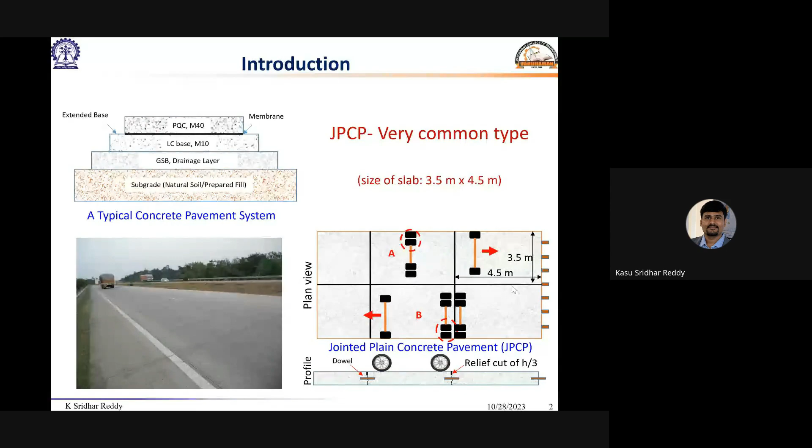Coming to the types of concrete pavements, we have got a variety like jointed plain concrete pavement, which we typically see on Indian highways, but in most cases we may not be able to see CRCPs - continuously reinforced concrete pavement systems. But slowly people are trying to adopt CRCP in India also, and a new code has come up for CRCP.

There are no specific guidelines for JRCP, jointed reinforced concrete pavement, even in the case of AASHTO, because there are a lot of limitations and restrictions on how to design, and a lot of debate on how to design and what kind of performance criteria needs to be considered for JRCP. So therefore, we do not have much guidance from various agencies across the world.

Coming to the jointed plain concrete pavement, like any other pavement, it will also suffer from various kinds of distresses. Typically, we design for the transverse cracking not to happen on the highways, and therefore we have to account for the transverse cracking.

In addition to that, you may also come across some kinds of cracks like longitudinal cracking, which is along the traffic direction, and there are some cases which may also see corner cracking in terms of durability. The moment longitudinal crack occurs, this chunk of the slab is going to be longer in span and smaller in width, so therefore it is highly prone to transverse cracking. When the transverse cracking and longitudinal cracking meet each other, the slab is going to shatter into a number of pieces.

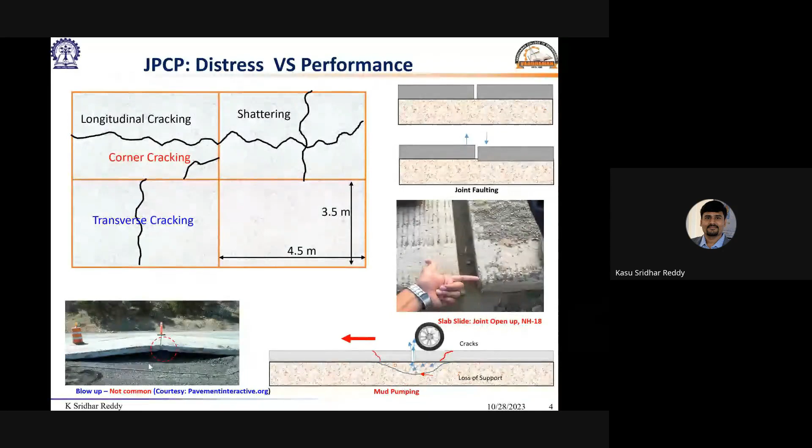Considering those distresses, we only bother about the transverse cracking in two ways - one is about bottom-up cracking and the other is about top-down cracking. Both of them are transverse cracking only, but they are respective to the temperature gradient that we see.

In the daytime, the slab is expected to curl something like this. In the night time, the slab is expected to curl something like this, because of the temperature difference from the top fiber to the bottom fiber.

Considering those curling movements in the slab, if we allow traffic onto it, the moment it loses its support at the mid portion, or loses support at the edges during evening hours or late nights, there could be a possibility for top-down and bottom-up cracking scenarios.

As per IRC 58, we consider a philosophy called Miner's approach for cumulative fatigue damage analysis, where we always seek the thickness which is safer in terms of cumulative fatigue damage, which must be less than 1, both in the case of bottom-up cracking and top-down cracking.

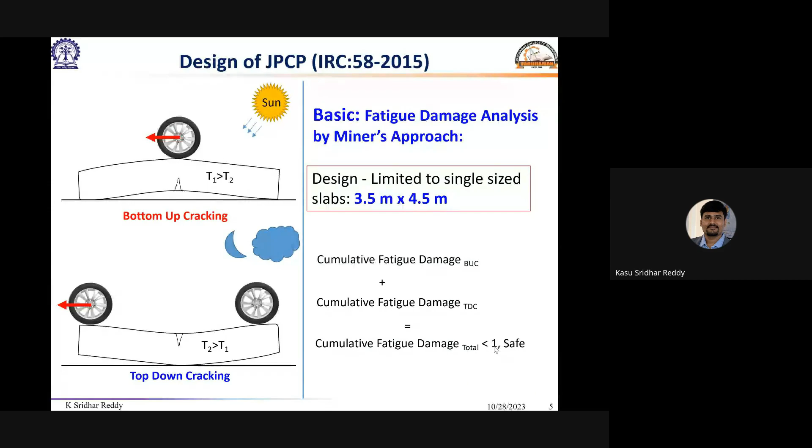Ideally, when we design the concrete pavement with IRC 58, we may arrive at 270, 280, maybe up to 320 mm slab thickness for our Indian national conditions. Owing to restrictions in handling such thicker slabs at distressed locations, it becomes a typical and cumbersome job. So when we look for an alternative, there is one called cast in situ short panel concrete pavement.

we are bound to use load transfer devices. But when we go for thinner pavements, we solely depend on load transfer through aggregate interlock - a kind of shear lock mechanism that happens the moment all the designated joints crack to full depth. All those cracked joints are expected to serve load transfer through aggregate interlock only.

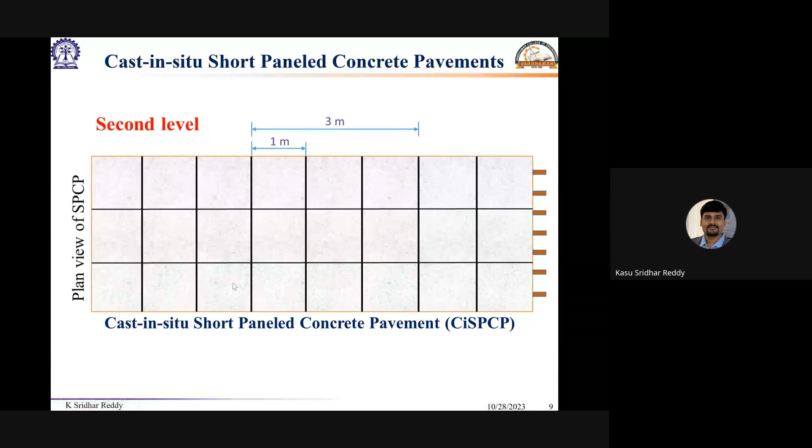Coming to the global experience on short panel concrete pavement, the first ever construction report that I have found through various databases is the construction report from Michigan Department of Transportation, where they introduced short slab construction in the 1970s. Thereafter, because of some restrictions on saw cutting, riding quality, and people's perception, they became reluctant to put these short slabs on their interstate highways.

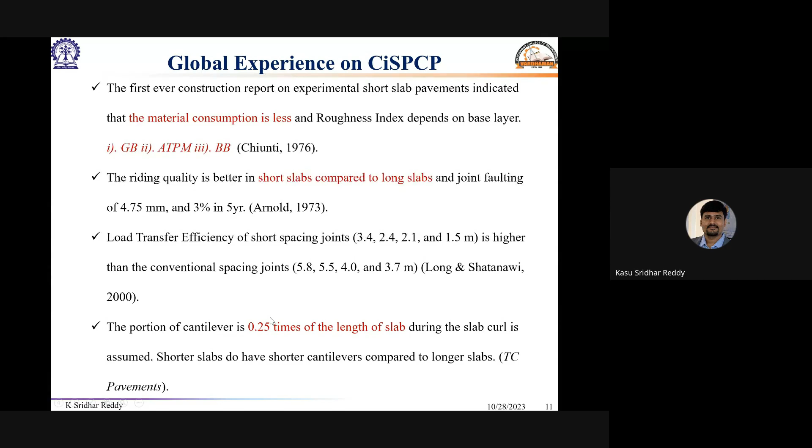Here the riding quality is better compared to the longer slabs, and we could also see the load transfer efficiency of short joint spacing is much higher than conventionally spaced joints. The portion of cantilever is assumed to be 0.25 times of its slab length, but it is unknown. We have tried to quantify it.

Coming to the lateral drainage and subsurface drainage, there was a concern about movement of very fine particles from the base layer and sub-base layer to the top. So eventually, when it loses its fines at the base layer and sub-base layer, it will also lose the support, and eventually this will result in corner cracking.

Coming to the accelerated performance testing of short slabs, this was a sponsored study carried out at the University of Illinois. They found that corner cracking and longitudinal cracking is predominant on their test track.

Coming to short slab sections, Chile has been aggressively trying to adopt these short slab concrete pavements in recent times. They have constructed a lot of short slab sections on their highways. With their observation, longitudinal cracking is higher than transverse cracking in the case of short slabs, compared to corner cracking.

What I feel is, corner cracking is dependent on how thick a slab you are providing during construction. If you are providing thinner slabs, they are more prone to curling, so there will be a high chance of corner cracking. If you are providing thicker slabs, rather than having a lot of curling, they will result in better performance in terms of corner cracking, and they'll result in either longitudinal cracks or transverse cracks.

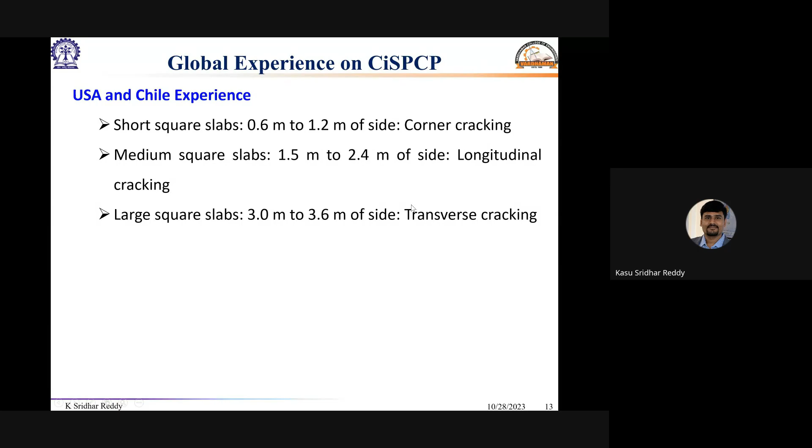Coming to the research gap, identifying the global experience, these are the research lacunae we have identified. There are no stress charts properly developed or available for ready-made design of short panel concrete pavement. There is no performance data, and there is no rational performance data.

Performance data is available on whether it is cracking in corner, longitudinal, or transverse direction, but we do not have any statistical number, and no design methodology or design guidelines are available for cast-in-situ short panel concrete pavement. India is going to have a new IRC draft on cast-in-situ short panel concrete pavement, maybe in a month or two.

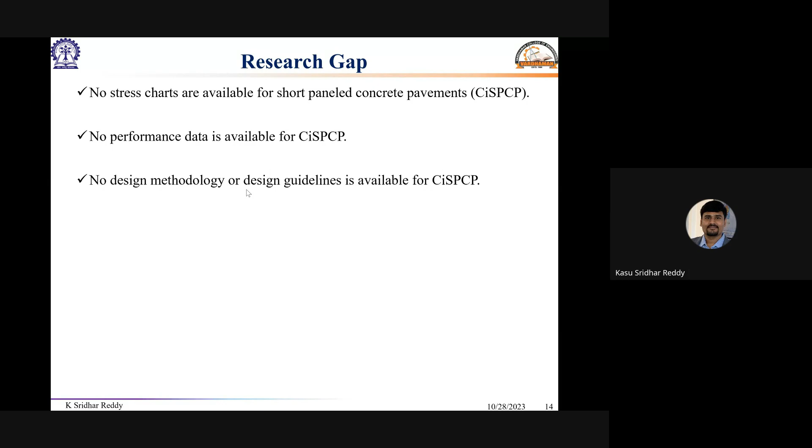It is at post-processing stage of publication. It has been approved at various levels, so that is going to be published, and it has not been given any serial number yet, so therefore I do not want to disclose that IRC code number.

Coming to the construction of short panel concrete pavement on low volume roads, this was done by Professor Pandey, under supervision with the kind help of engineer Rajiv Chitraj. He's the superintendent engineer from West Bengal. With his kind help, Professor Pandey could supervise, and with his innovative idea, he could construct a short panel concrete pavement on a block pavement.

The existing block pavement was permanently deformed all along its wheel paths, and there was a lot of settlement at some locations. As we typically understand on our Indian roads, whether urban or rural area, all our roads suffer from surface drainage and subsurface drainage issues. Poor subsurface and surface drainage is there at all levels, at all classifications of the roadways.

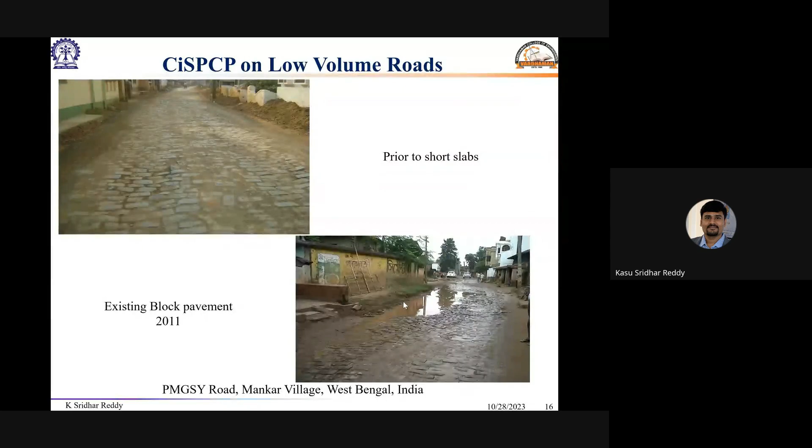Prior to the short slabs, this was the condition of the block pavements, in a village, and this road runs through a village. It was supposed to be constructed by PMGSY. That was the initial condition, and when Professor Pandey suggested this short panel concrete pavement, at that time there was not much technology to make use of good diamond cutters to make the sockets at regular intervals, and it was expensive.

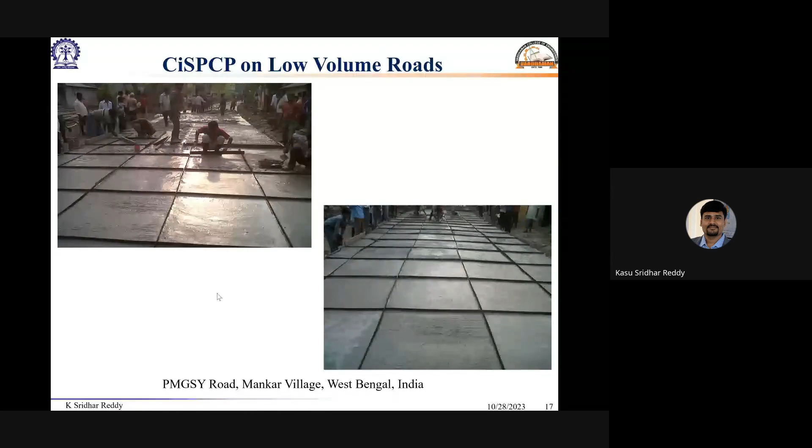So therefore they made a very traditional way of making the joint sockets by introducing a 3 mm thickness wooden plank. They inserted it at regular intervals as per the slab dimensions, and it was opened to traffic, and it is absolutely working fine.

Personally, I have visited this village road, and we have carried out falling weight deflectometer studies on the same road. It was found that good load transfer efficiency was observed, higher than 85%. It is well and good, even after years of service to the traffic.

Coming to the observation at the edges of the pavement, all the sockets that they introduced with the wooden planks or plyboards of 3 mm, all of those joints are cracked to full depth. So that means what we designed for is absolutely served its purpose.

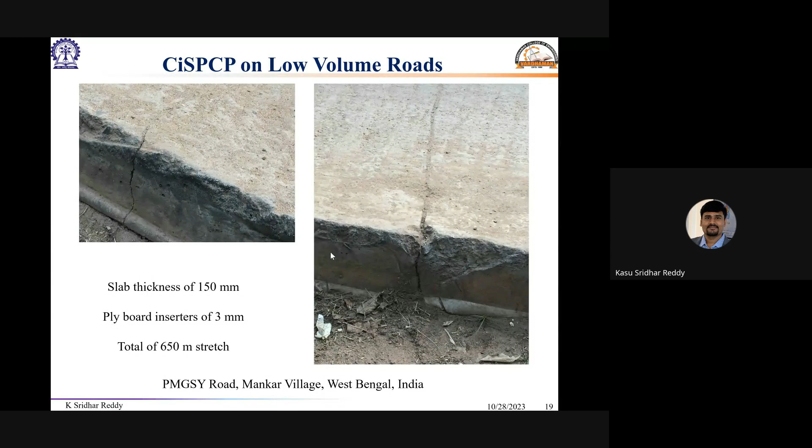This section was around 650 meters, and it carries heavier loads of sand quarry traffic in that village. The slab thickness was about 150 mm. This was the second test section that was done under the supervision of Professor Pandey.

But personally, I was there during their construction, and I have tested their materials for fatigue and all the laboratory characterization. This is another road which will also carry sand truck traffic, about 100 to 150 sand trucks moving on this road every day.

This was the condition of the existing pavement, where Professor Pandey suggested cell-filled concrete pavement way back in the early 2000s. By the time it reaches 2015, 2016, this was the condition of the pavement. There was a large settlement in the cell-filled pavement. So therefore, they approached Professor Pandey.

We suggested short panel concrete pavement on it. By making corrections wherever the larger settlements were there, we suggested corrections using a lean concrete material. Once it was leveled, we put in a 100 mm slab thickness pavement. The sockets were made to 1/4 to 1/3 depth.

Usually we make it to 1/3 depth, since it is a low volume road, and it was hard to procure diamond cutters for a local contractor. So we used handheld cutters to make sockets at every 0.5 meter, in the longitudinal direction and in the transverse direction. This was the finished pavement.

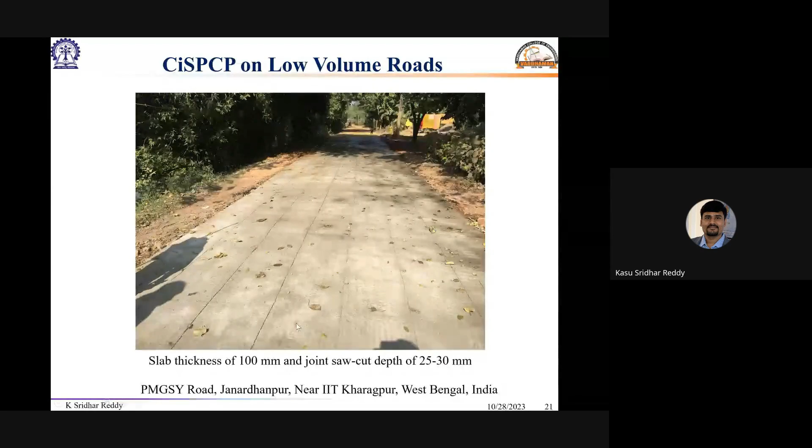Coming to the test sections that we have constructed on national highways, we have constructed two test sections: one on NH18 and another one on NH19. The one we made for NH19, which was a Grand Trunk Road on Panagarh bypass, was used for making the construction report on short panel concrete pavement. Because we do not have any construction practices for short panel concrete pavement, especially on highways, although we have got a little experience from the low volume roads.

The second test section was constructed for about 1.5 kilometers on NH18, which runs through Jamshedpur, Ghatsila, and Chichira, connecting to Chichira of West Bengal and Jharkhand border. This carries major traffic, since Tata Steel factory is in Jamshedpur and Hindustan Copper Limited is nearby, so all truck traffic carrying raw materials passes through this highway, and this was used for the performance investigation.

Through this, we were able to arrive at some preliminary analysis about how to select the slab thickness, how to select the site, and what kind of materials to select for the construction purpose.

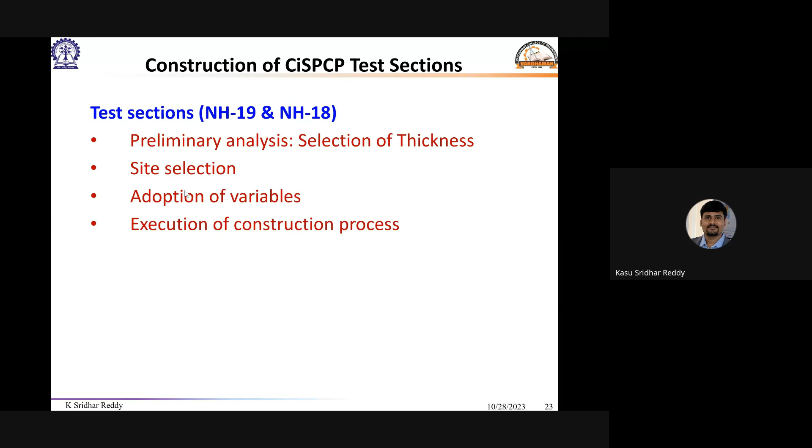For the first test section, we made a single slab model. This was suggested by Professor Pandey and MV Arunchand of Kerala state, who is probably working for PWD of Kerala. His initial investigation in his MTech work was extended to the preliminary analysis of the single slab model, and I extended the same for identifying the slab thickness for the first test section.

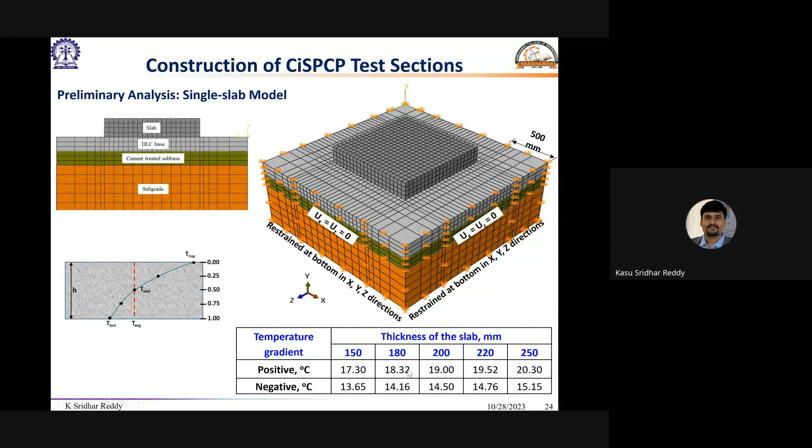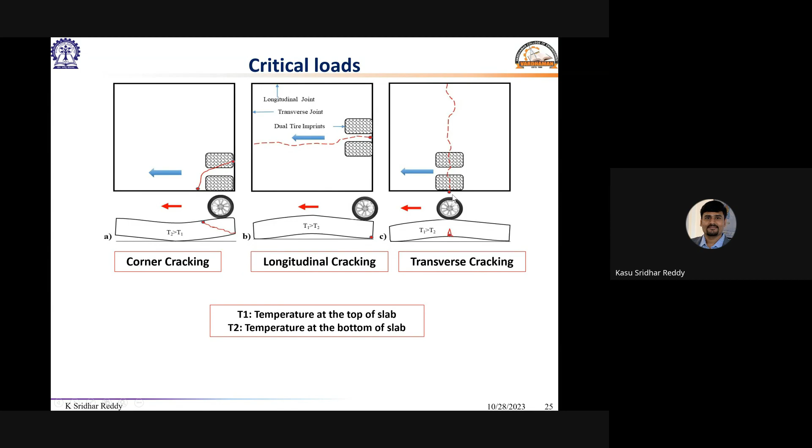These are the slab temperature gradients suggested by IRC in various codes, IRC 62 and IRC 58, for various slab thicknesses, and some of the slab thickness temperature gradients were interpolated. We adopted a non-linear temperature gradient for critical load conditions: one for corner cracking, another for longitudinal cracking, and a third for transverse cracking, owing to their performance reported in literature.

Coming to the construction of the first test section, which we did on a high embankment, located at a pedestrian underpass, PUP, or vehicle underpass. There was a high embankment as high as 6 to 8 meters at the mid location.

We could see around 384 meters of stretch on the NH19 section, where we varied the interface bond conditions, but the slab thickness remained the same. So these are the variables we considered.

Coming to the sub base and base layers, we strengthened them as much as possible from the contractor's and the client's perspective. To account for this, we used 2.5% cement content for making the cement treated sub-base layer, and for the lean concrete base, that is dry lean concrete, but for the first time, we tried a porous DLC layer on this section.

In the literature review, we saw there is a restriction on fine content because of the number of joints present in short panel concrete pavement. There's a high chance the fines would move up through these joints, so we wanted a restriction on the fine content. Therefore, we went for zero fine concrete, literally, for the lean concrete base.

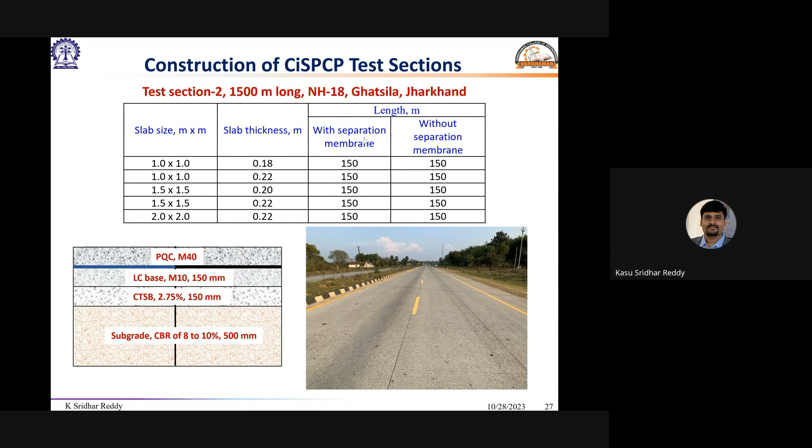Coming to the construction process in stages, the first stage is preparation of the subgrade for the readiness of the cement treated subbase.

The cement treated subbase—by the time we had selected the site, it was too late and they had already compacted the subbase layer. So with our supervision and suggestions, they modified this already compacted granular subbase layer with a cement content of 2.75%. We spread the cement bags all along its 1.5 kilometer stretch, cut the bags, and spread them over the larger area, and this cement mixing happened through a plogger machinery.

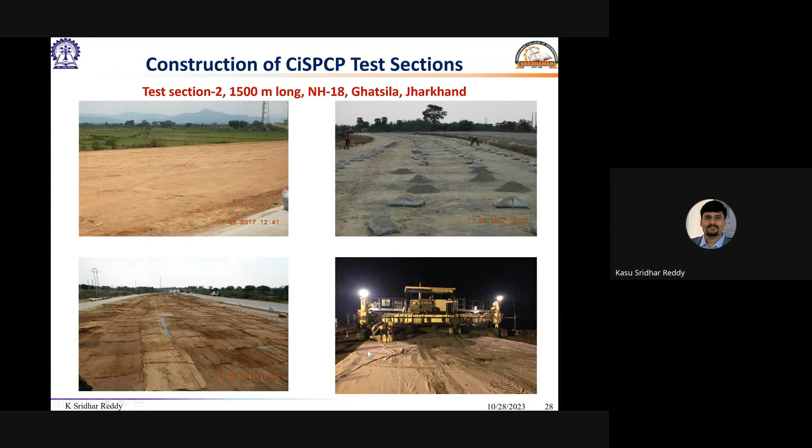Then the DLC was constructed in 2-lane construction since it is a 2-lane highway with paved shoulder. Its pavement width was around 10 meters, but the lane construction for the DLC used asphalt paving equipment, so it has a longitudinal joint in the DLC. Wherever we had to put the geotextile membrane, we put it, and then full width paving happened in one go.

Coming to the finishing stage, it is now in servicing stage. Two of the test sections are in servicing stage. The one constructed later, test section 2, is performing absolutely fine and carrying high truck haul. Here we could see there is a mention about slab thickness savings—it is around 50 mm to 90 mm compared to the adjacent jointed plain concrete pavement.

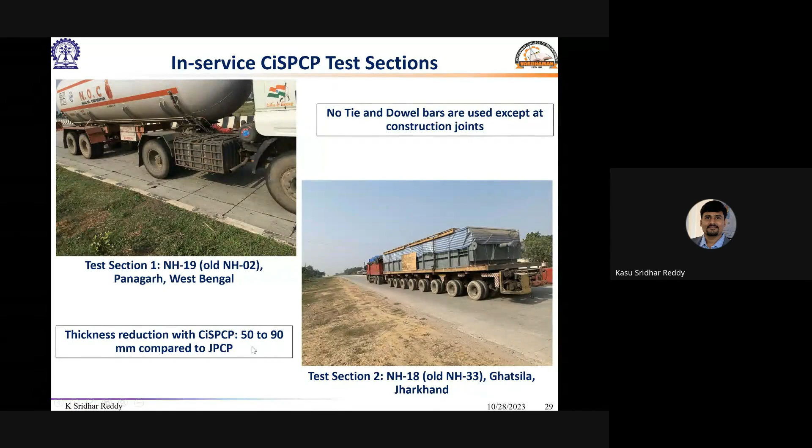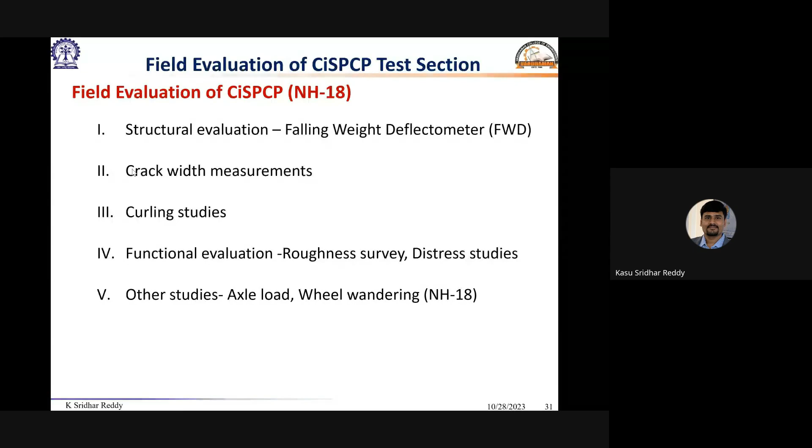Coming to the field evaluation of these test sections, initially we planned for structural evaluation. Later, we tried to evaluate it functionally also, in addition to the structural evaluation. Crack width measurements and curling studies were done because there is a lot of gap in the literature, so we wanted to understand that, and therefore we carried it out.

We compared two deflections—one is the unloaded slab deflection and the other is the loaded slab deflection—and tried to calculate the load transfer efficiency. This load transfer efficiency data is plotted against various seasons ranging from winters to summers, and across slab dimensions of 1 meter by 1 meter, 1.5 meter by 1.5 meter, and 2 meter by 2 meter. All of them are square slabs only, unlike the jointed plain concrete.

Here we could see that the load transfer efficiency increases with age. As I told you earlier, with the kind of first level cutting we made, the concrete has a tendency to crack only at 3 meters, 4 meters, or 5 meters at regular intervals, but not at 1 meter or 2 meter, whatever joint spacing we make.

So by the time we opened the traffic and during its service, the number of contraction joints adjacent to the initial cracked joint also gets cracked. Therefore, the joint opening at every contraction joint has become very small. Because the joint opening is small in dimension, there is a large load transfer distribution that happened. The load transfer efficiencies ranged between 65% to 95% for any given slab dimension adopted on our test section.

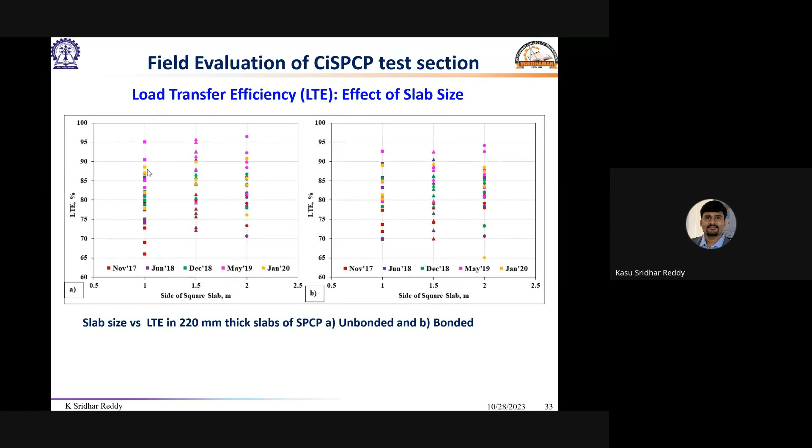The second thing we tried to observe is whether there is a correlation between the joint opening at the edges along with its load transfer efficiency. For that, we first identified where to measure crack width, since we do not have any specific guidelines or test protocols to measure it. So we used a simple handheld microscope bought from a local supplier—it's cheap enough, costing around 5,000 rupees. Anyone can perform these crack width measurements at their own convenience.

We captured some images, and these images were processed further; we measured the crack width through a calibration process, and the average crack width within that image is taken as the crack width, which is plotted against the load transfer efficiency. We could see that a number of joints fall in the first region, and some joints fall in the second region. These regions were identified based on the long-term pavement performance program threshold of load transfer efficiency of about 85%.

This 0.6 mm crack width is identified and marked as conservative. In the literature, they have suggested around 0.725 mm, but that was not from a proper test protocol that somebody carried out.

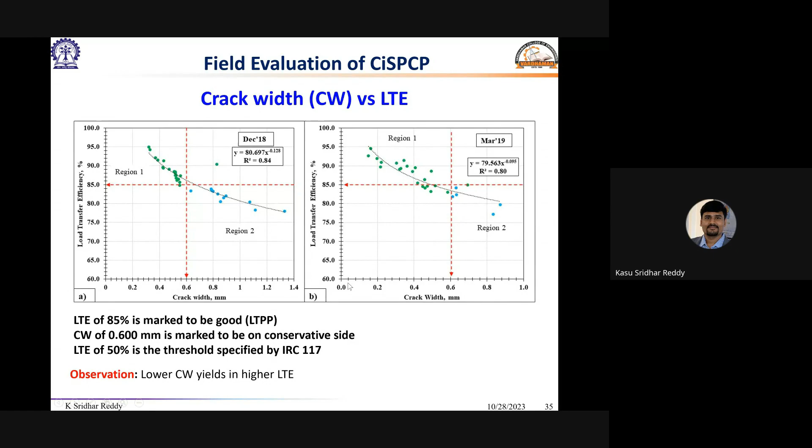Load transfer efficiency, considering 50%, is a threshold limit specified by IRC 117 for concrete pavements. We see that a large number of joints perform better, both in terms of load transfer efficiency and crack width opening. Very few joints fall into region 2, but still these two regions of data fall into the good to fair performance range.

Coming to the field evaluation of curling, rather than performing in the laboratory or within the campus as most people try to do, this is real-time data. We fabricated our own setup with aluminum frames, with a stud set on either side. At the mid location, we fitted a dial gauge to capture slab deformation with time and temperature changes. In addition, we also measured the temperature gradient along the slab depth.

This is the curling profile that we typically see. It looks like a sinusoidal wave when plotted on a timeline diagram, though here the timeline diagram is plotted at a different scale with the slab dimension, so it appears as a sinusoidal wave.

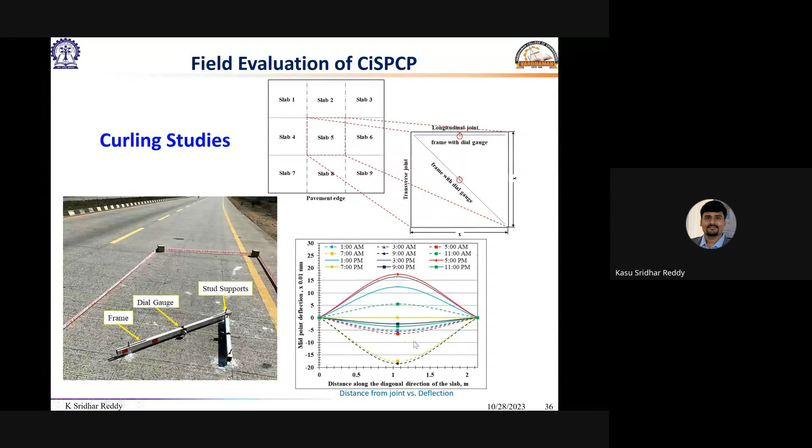If you keenly observe the curling data, there is a delta T temperature gradient along the slab depth, with a maximum slab temperature gradient at some location at some point of time. After 2 to 3 or 4 hours, we see the maximum deflection in slab curvature. This means the slab curvature is not instant; this behavior is attributed to the thermal conductivity and specific heat of the concrete material.

In addition, we found that the higher the slab dimension, the higher the curling magnitude. From 1 meter to 2 meter slab dimensions, the slab curvature increases, and the magnitude of curling increases, whether it is a bonded or unbonded pavement.

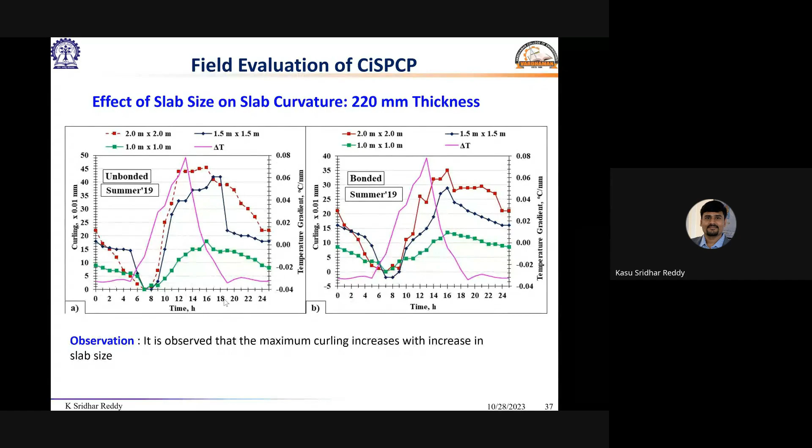Moving on, a lot of people have a perception that short panel concrete pavements with too many joints will cause poor riding quality. It is not a fair perception, and it is not so — this is proven by our investigation.

We compared different slab dimensions, which account for a large number of joint spacings, in addition to jointed plain concrete pavement. As per our belief and understanding, the paving mechanism adopted at the construction stage influences riding quality much more than the number of contraction joints provided on concrete pavements. All our test sections performed in good to fair condition, except at one location.

When we compared these sections with jointed plain concrete pavement, the riding quality was even poorer than our short panel concrete pavement. So there is essentially no correlation between riding quality and short panel concrete pavement joints, and this was the case in the literature as well.

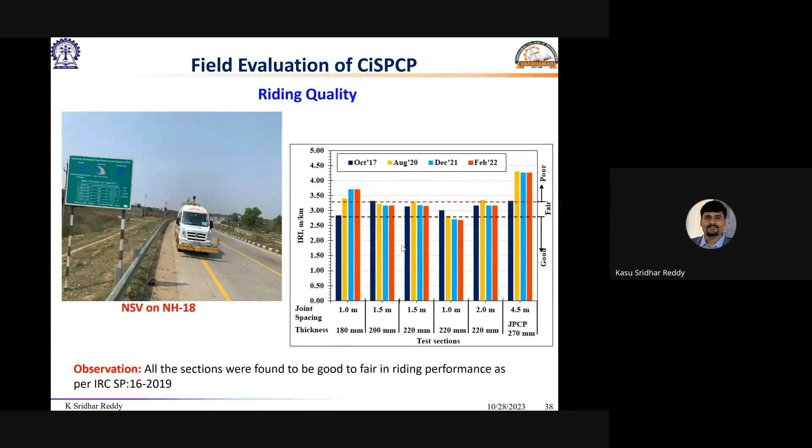Coming to the identification of critical wheel paths, we conducted wheel wandering studies on highways by marking the pavement at 250 millimeter spacing. According to the slab width, pavement width, and number of lanes adopted on the highway, these critical paths will change accordingly.

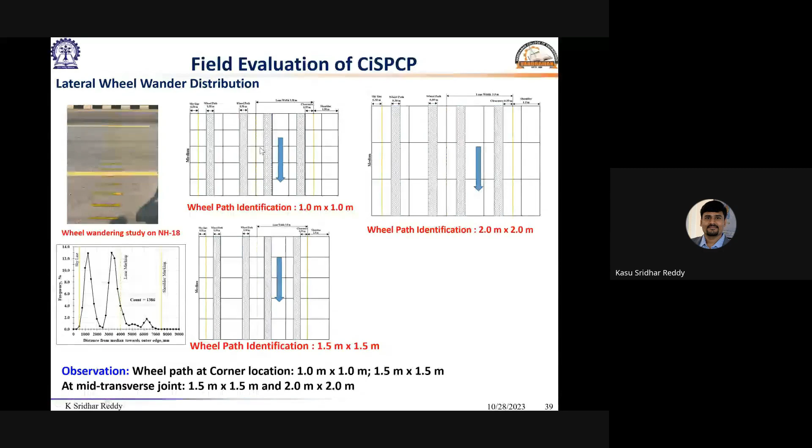When adopting a slab dimension, you must choose carefully. As part of this study, on 1 meter, 1.5 meter, and 2 meter slabs, we tried to identify the critical path location for a variety of slab dimensions, and through this we identified some critical load positions, which I'll explain in the coming slides.

Thereafter, the data we collected from the falling weight deflectometer was simulated using Abaqus software by modeling the pavement system. This pavement system was used to back-calculate all its properties and boundary conditions, which should be in line with real-time conditions. Similarly, a number of slabs were considered in the finite element model to account for boundary condition effects, with an extended base each time.

If you see in real-time pavement construction, the base and sub-base layers are extended in nature. They are not going to drop sharply along with the slab dimension or pavement width. Therefore, extended base is considered to avoid unnecessary complications in modeling, and these joints were modeled with translational springs.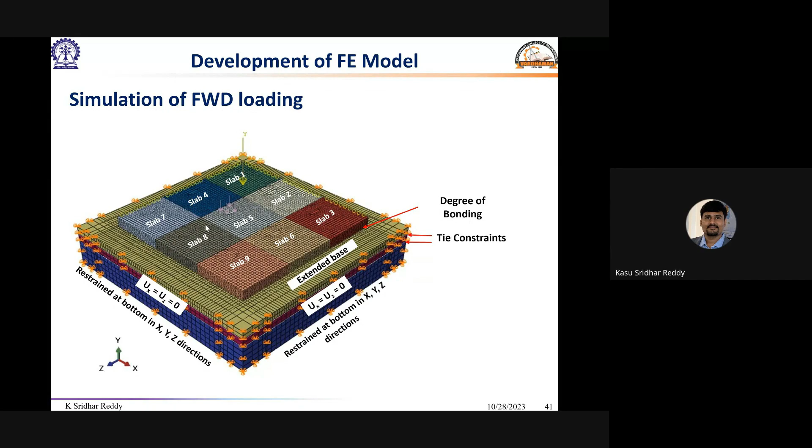We have applied a similar kind of falling weight deflectometer loading on one kind of slab and observed the deflection bowl. These deflection bowls were compared with the field deflection bowls obtained from FWD. When they were in better match in terms of root mean square error, we identified that our model is calibrated.

Further, that model is used for developing the stress charts to calculate the stresses for a variety of conditions. Different temperature gradients as per IRC 58 were considered, one at the maximum temperature gradient and another at the lower side, and we considered the axle load magnitudes in line with the National Highway system.

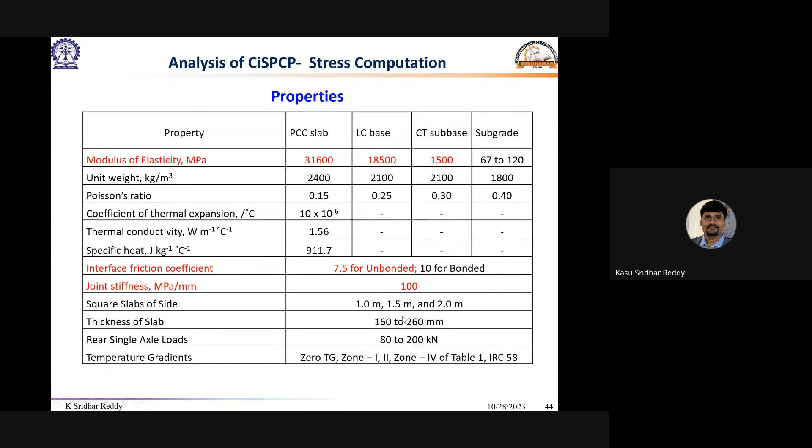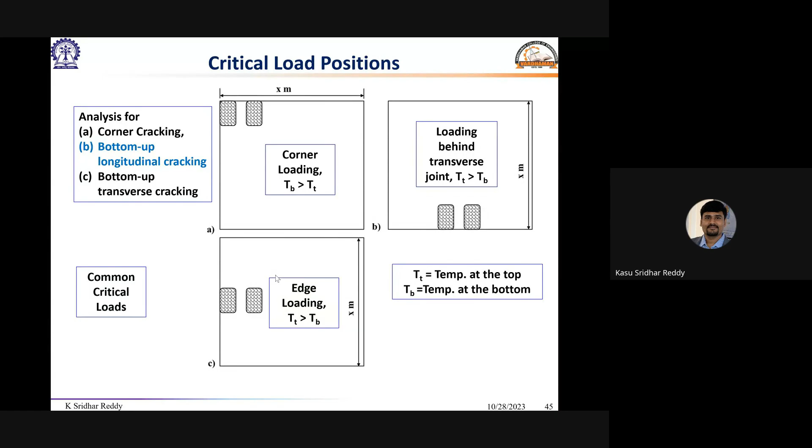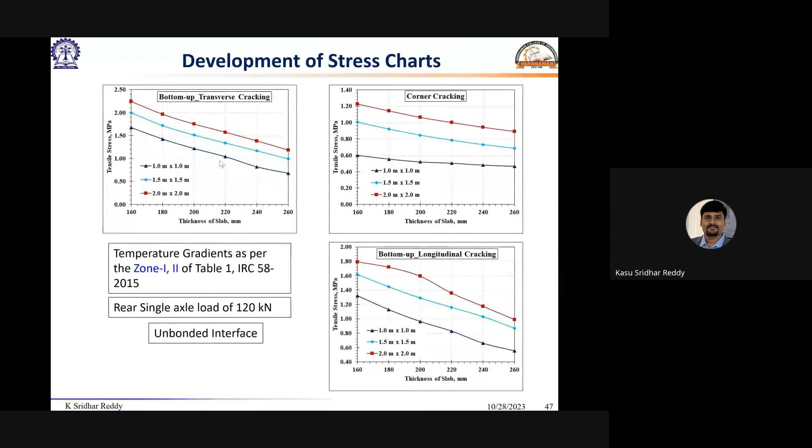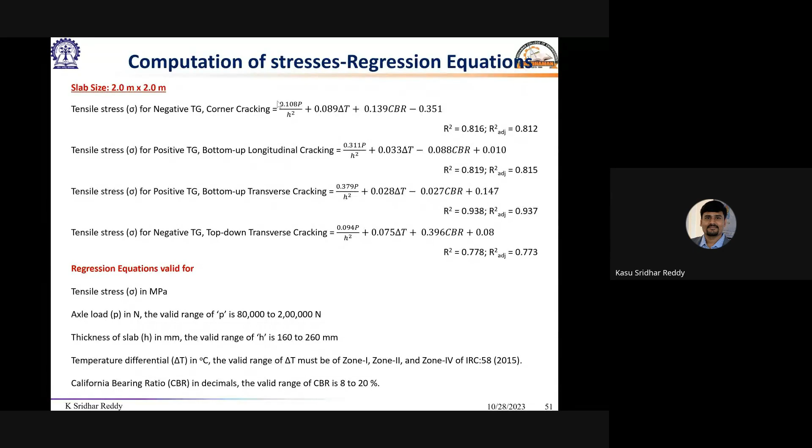Through these stress charts, we developed regression equations for computing the stresses, and these equations are very flexible and easy to use. They are very similar to IRC 58 equations, and in a way we can also describe that these regression equations are in line with the Westergaard equations—they look absolutely similar. These regression equations have their own set of limitations; depending on the availability of data, we have presented the equations here.

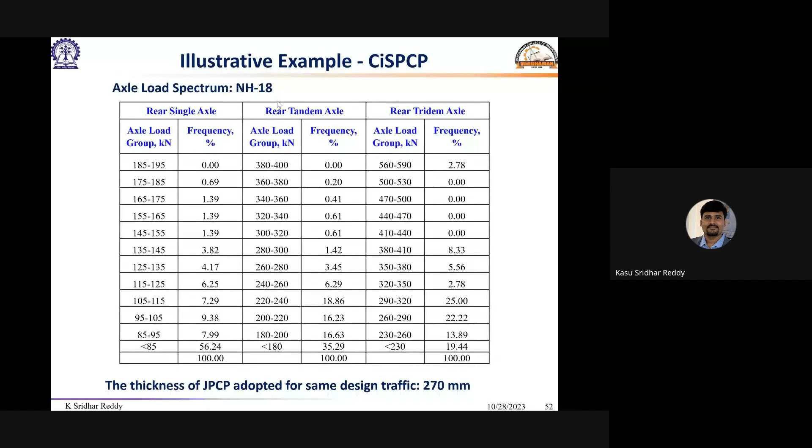Coming to the illustrative example from our study, considering the axle load spectrum that we initially adopted for NH-18, for the same design traffic, JPCP thickness was around 270 mm, and these are the model parameters to compute the stresses and stress ratios.

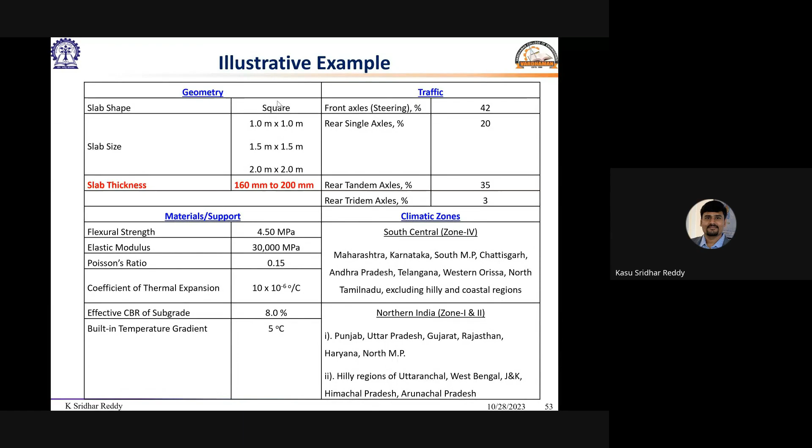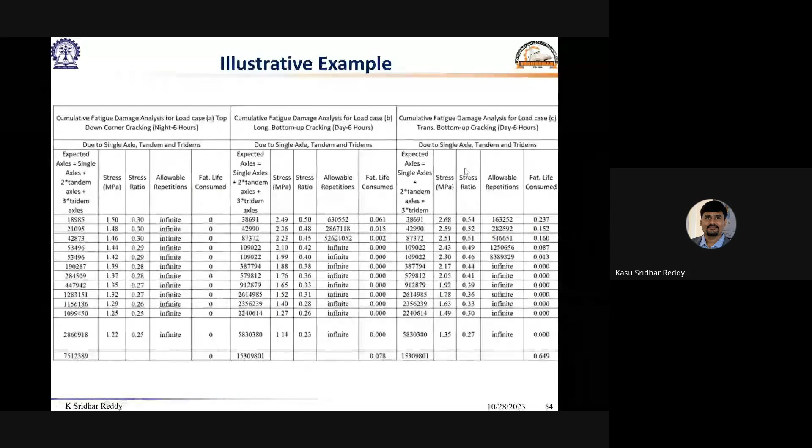Further, we have computed the fatigue load repetitions. This is how the stress spreadsheet was prepared in line with IRC 58. For cumulative fatigue damage analysis for top-down corner cracking, we accounted all single axles, tandem axles, and tridem axles converted into single axles. For the longitudinal bottom-up case, the same approach is adopted, and for the transverse bottom-up cracking case as well.

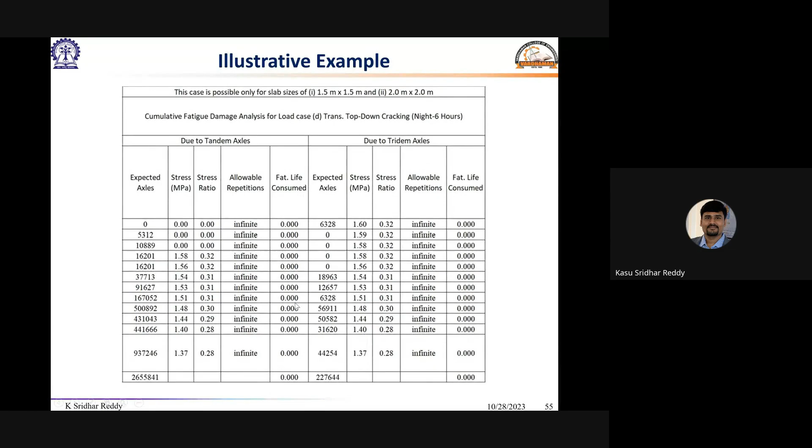But coming to top-down transverse cracking, we accounted only tandem axles and tridem axles to compute the stress ratios, and then the allowable number of load repetitions to compute the fatigue life consumed.

At the end of the study, we have also given an illustrative example with a neat tabulated form to observe whether our assumed slab thickness in the test sections is safe or not. When we stipulate the slab dimensions and thicknesses in line with the axial load spectrum, we have seen that whatever thicknesses we verified, all of them satisfy the cumulative fatigue damage criteria with the geometries adopted in the field.

One has to note that this short panel concrete pavement, in terms of cost of construction, is almost equivalent to bituminous pavement. But there will be a performance difference on the other side.

So we have to look at, when we try to adopt a type of pavement, we have to look at its life cycle cost analysis and its initial cost of construction also, and they should be compared with the performance.

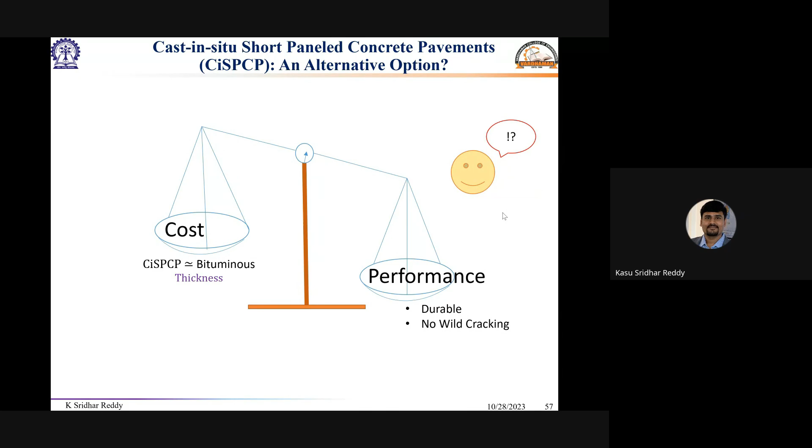I must thank my love and my hero, Professor Pandey, because of his selection of the topic for my PhD research. He is my trust, he is my force to carry this research. I must be thankful to him, big thanks to him. And I must also thank the contractors and concessionaires who allowed me to construct my own kind of recipe on their highway. It was sponsored by National Highway Authority of India, I must be thankful to them. It is a sponsored research. Thank you all.

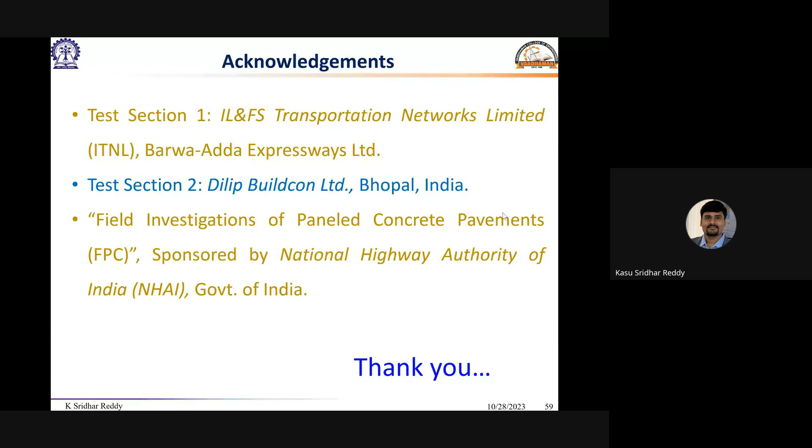That was a wonderful presentation from Sridhar sir. Now we can start the panel discussion. I invite the moderator of the discussion, Engineer Ajit Kumar GS, an eminent practicing engineer with more than 30 years of experience in the construction field, having held positions like Project Director, Project Management Unit, Rebuild Kerala Initiative, Superintending Engineer PMGSY, Superintending Engineer Thiruvananthapuram Corporation, and now Chief Technical Consultant. Now over to you, Ajit sir.

Thank you. Good evening all. Thank you, Sridhar Reddy sir, we had a wonderful presentation on a relevant topic. We can now start the panel discussion. I will first introduce all the panel members.

Firstly, thank you, Sridhar sir. You are one of the wonderful persons. You are a great person. Super, IIT Kharagpur, you are the super person.

Thank you. First, engineer Sri Rajib Chatraj sir, Chief Engineer PWD West Bengal, has pioneered the execution of SPC in India. He has published a paper on design of SPC pavement way back in 2010. Kerala has started construction of SPC in 2020 through Rebuild Kerala Initiative. We have taken his advice and he was mindful to advise us proactively. Sri Chatraj sir graduated from REC Durgapur, now NIT Durgapur, in 1986 and joined PWD Government of West Bengal in 1991. He has more than three decades of professional experience in building public assets like buildings, bridges, culverts, and highways, and is presently serving as Chief Engineer, National Highway Wing, Public Works Roads Directorate, Government of West Bengal.

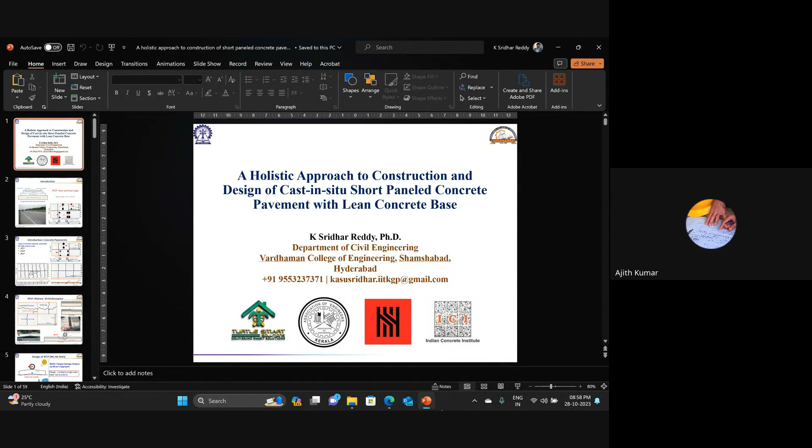He is now a member of several technical committees of IRC. He served as Superintending Engineer of many NH projects, among which NH60A, Bankura Purulia NH, and the high-level bridge over river Kantania Doania on NH117 had won the Excellence Award of the Ministry of Road Transport and Highways, Government of India. He took part in academics and research works related to pavement engineering. He has, to his credit, several published papers in Indian Road Congress journals and also in international journals of road material and pavement design by Taylor and Francis. Welcome you, sir, to the panel discussion.

Thank you very much, I think I'm audible. First of all I beg apology because of some problem with the Wi-Fi connection at my home. I am attending this webinar through my mobile only, so there may be some disturbances.

Thanks to the organizer for taking the initiative of introducing such a very innovative technology. And thanks to very beloved Dr. Sridhar and Dr. Vishnu, both of them doctoral scholars from IIT Kharagpur. With them I was actually acquainted from their research days, PhD days. And I was also very fortunate to be very closely associated with Dr. B.B. Pandey, none other than the father of pavement engineering in our country, we call him. So actually, the story started...

Dr. Sridhar has presented in his presentation and shown some pictures of what was probably the first, though it may have been a small project, of its kind - the short slab, or what we called at that time, short panel concrete pavement. Now the code that's coming calls it short slab concrete pavement, whatever.

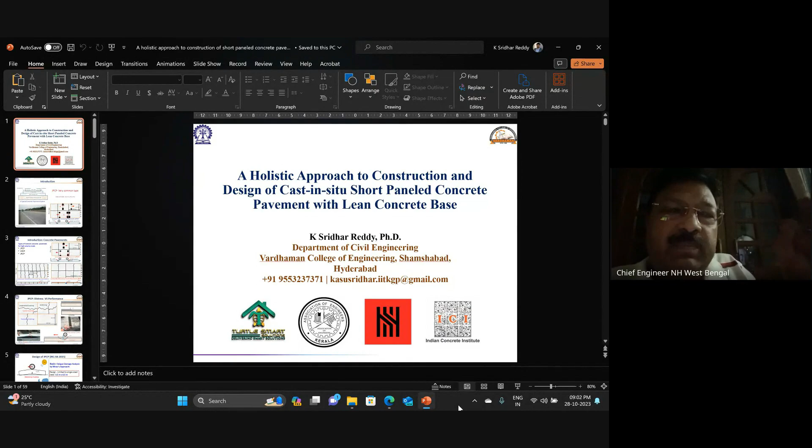Also, Dr. Sridhar had told me about this joint paneling and saw cutting. It was started with putting a 3 millimeter thickness of ply, but that didn't work actually. What we adopted instead was hand operated marble cutting machines. Finally, the picture Dr. Sridhar showed, where the crack propagated up to the end, that was the intention actually, and that was the beauty of the technology.

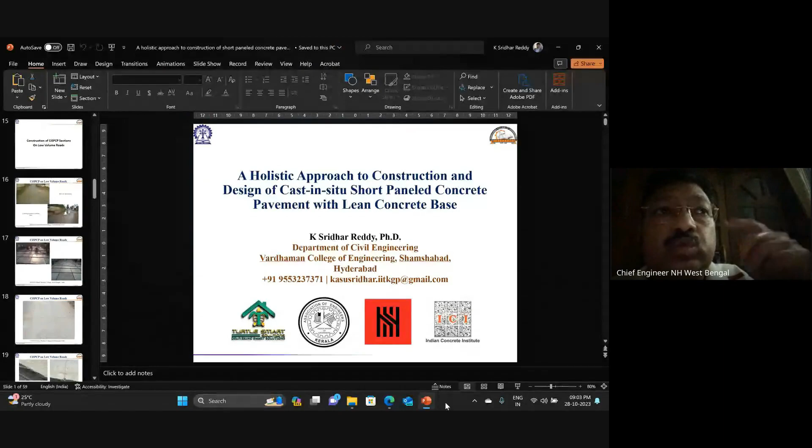One point to be mentioned from the workmanship point of view is that there is a specific time window that is very important for the saw cutting. 8 to 10 hours after the PQC was laid, doing the saw cutting within that time window is very, very important.

Also, since this is much lesser thickness than the conventional JPCP, which is around 300 millimeter plus thickness, here we have done the PQC at 150 millimeter. There is a specific provision, and the code is going to be published. It's almost in its final shape.

Today Professor Amarnath Reddy also presented in another webinar. I'm also a council member. It has been presented to the IRC, in the last midterm council meeting in Raipur, and now in Gandhinagar it's going to come up in December, going to be published. I had a talk with Professor Amarnath Reddy sir and Joga Rao, and at that time Sridhar was the researcher doing the research on this topic.

The Mankar project was a very humble step, a small step, but towards a very promising technology that can replace the total JPCP. It's also pertinent to say that, so far as I know, this technology has not been tried in any other countries. Maybe somewhere in Chile it has been tried, not even in the US, not even in Europe has it been tried. If it has, I'm sure there are some issues, some delicacies there.

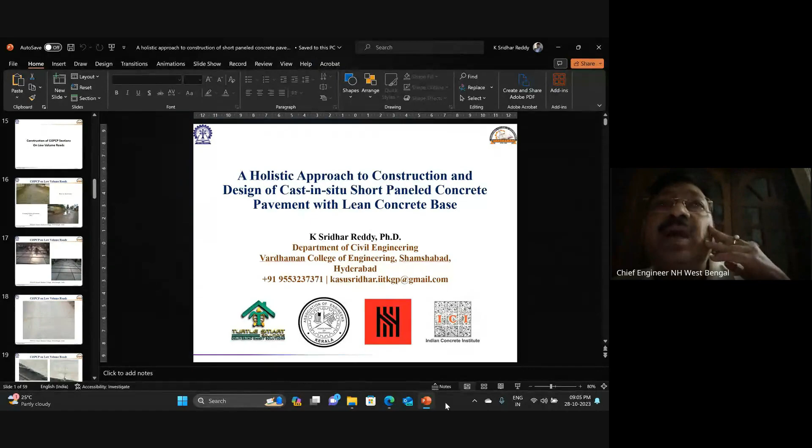Concrete itself is a very delicate material compared to bituminous work. There are some delicacies in bituminous construction too, like maintaining temperature and so on. But with my experience, concrete is much more delicate material to handle, especially in the form of pavement structure, where the surface area is much more compared to the volume of concrete. There the plastic shrinkage crack occurs very often, and that is a killer, we all know that.

This time window of saw cutting is very important for adopting this technology, and you have to be very, very careful while executing it. I remember, in 650 meters length of this pavement, we completed the work way back in 2012, in the months of March and April.

So far, it is performing very nicely. After seeing this success of this short stretch of road, Professor Pandey, along with his disciple, was very excited to approach NHAI for the test section.

Both test sections, as Dr. Sridhar Kasu mentioned, in Panagarh bypass (NH19) and NH18 in Jharkhand, I have visited. Actually in Panagarh, which was a bit earlier of these two case studies, there was some construction issue, and a portion of that short panel concrete pavement was dilapidated after construction of 2 years or so.

Sir, I have one doubt. You told us and shared all the problems and advantages of the SPC concrete. You started the SPC concrete very early. So what was the contractor's response to this new technology, sir?

Contractor's response was good—we fortunately could reserve this work for the Engineers Cooperative. That was way back in 2011 when it was tendered, around 50 lakh was the budgetary estimate. The Engineers Cooperative who was awarded this work took great interest and took on all the shuttering and related work.

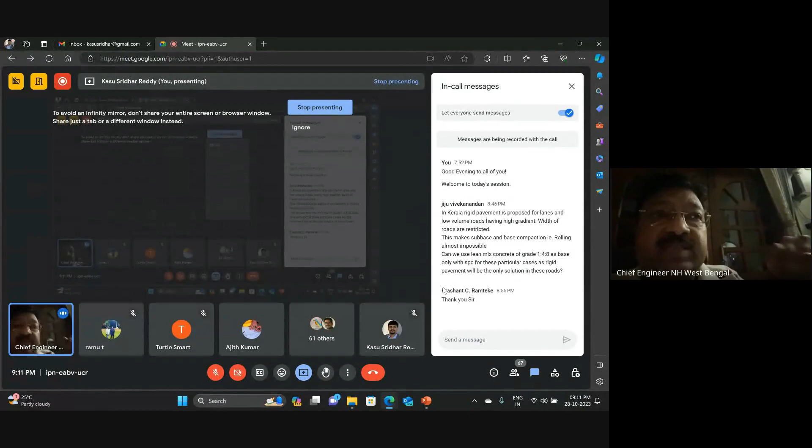It is very best and suitable for Kerala conditions, considering the soil, where soil conditions are better. I would also like to clarify whether we can go with just a GSB layer and 100mm short panel concreting, because we have already done that without using lean mix concreting. So somebody has also raised the question of whether we can go for lean mix concreting on gradient roads where we are not able to compact properly. I think Dr. Sridhar sir will be answering that question.

As far as PMGSY is concerned, we have also proposed 45 kilometers all over Kerala with short panel concreting as a new technology, which is already approved by NRIDA, and which will be completed within 1 or 2 years.

Comparing the cost, in a conventional bituminous road it comes to almost 43 lakhs per kilometer. For short panel concreting with 10 centimeter concrete and 10 centimeter GSB, we are getting 45 lakh per kilometer. So almost the cost variation is 5 to 10%, but the life cycle cost is comparatively better in short panel concreting. So we are observing that short panel concreting is best suited for rural roads.

So I would like to hear more about that, whether we will be able to go with that GSB plus short panel concrete of 10 centimeter thickness in rural roads also.

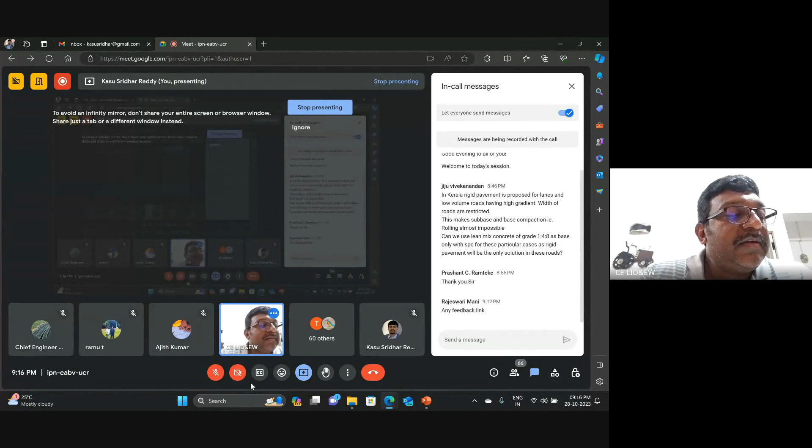And sometimes immediately after the concreting, the public will be using their vehicles to cross this road. So that type of difficulty we are facing, and the contractors are also reluctant, because only a lesser thickness of concrete is consumed in this. So that type of issues we are facing.

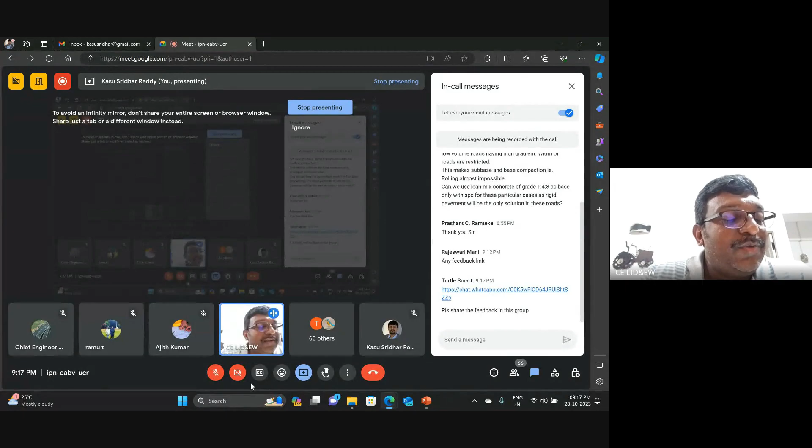So suggestions for overcoming these types of difficulties we are also expecting from Sridhar sir. Thank you.

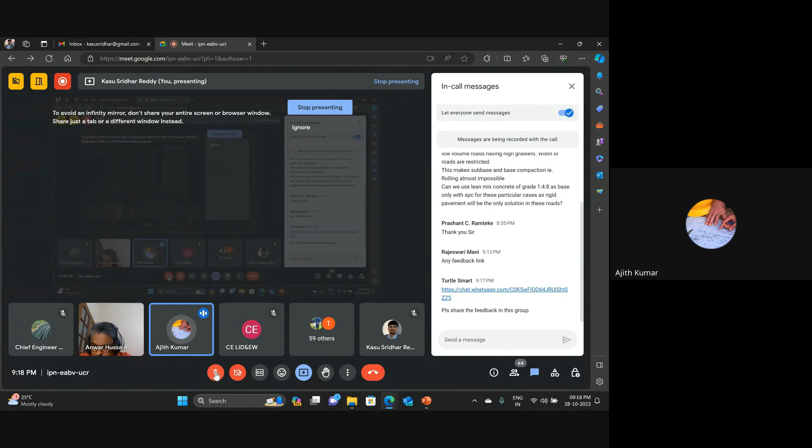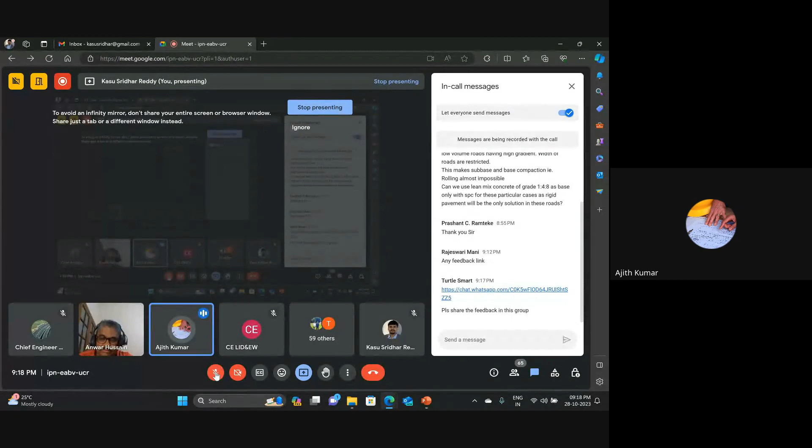Thank you, Ajith sir. Yeah, you are always an early adopter of new technologies, and you are the advisor of many government projects related to low volume roads. What is your vision on the adoption of this technology on low volume roads in Kerala?

Actually, this is a very wonderful proposal and presentation. Thank you, Dr. Sridhar Reddy, for this presentation on short slab concrete. I'm limiting my talk to one question only due to paucity of time, and actually due to some connection problems, I missed something here and there.

What I want to know is this: how is appropriate load transfer between adjacent slabs ensured for long-lasting pavements without curling or settlement due to differential stresses between the panels or below the panels at the time of load transfer. This is one thing, because there are a lot of panels there, and the junctions may be critical, I think, and I request an answer for this. Thank you.

Thank you, sir. Thank you, sir.

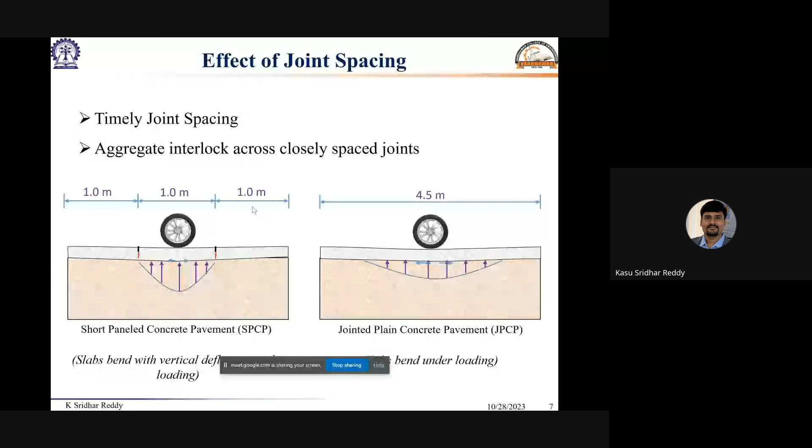What I would like to highlight is, when we make the saw cutting, the concrete has a tendency to crack only in the initial periods, at 3 meters, or 4 meters, or 5 meters. If you look at the profile diagram, some of the joints are cracked while some are not cracked to full depth, but eventually these contraction joints will also crack over a period of time.

In the initial investigation with FWD, this joint was cracked, and the adjacent one was not cracked. Therefore, the joint opening must have been higher in the initial days, and over time, as the adjacent joints cracked, the joint opening at this location became smaller compared to the initial joint opening of the same joint. That was the case that led to the increase in load transfer efficiency. Probably Dr. Vishnu must have gotten an idea about it.

Okay, the second question was about when we place the falling weight deflectometer on this short panel concrete pavement. Usually, it is expected that the geophones are going to spread over a larger area. So when they spread on the larger area, the first geophone is likely to fall on one loaded slab, the second, third, maybe fourth or fifth geophones may be falling on the second slab, and the last one or two geophones may likely fall on the third slab from the loaded slab. In such a case, yes, there is a hindrance in the deflection bowl, and we could see a kind of magnitude of drop in the last geophones compared to the geophones falling on the second slab. This was observed.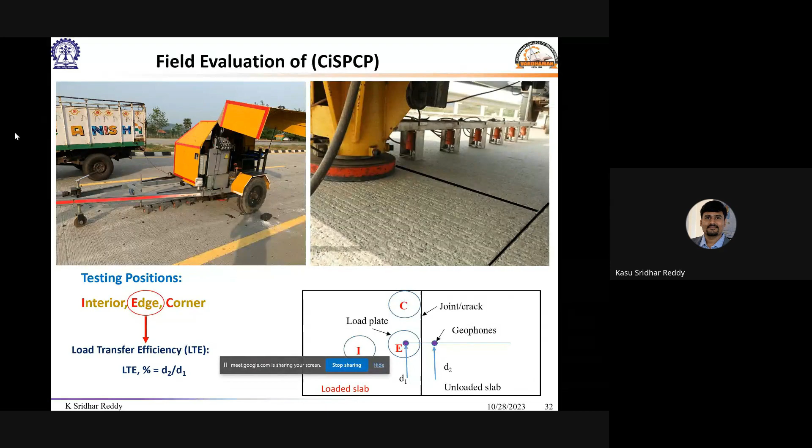But the geophones that are much away from the loading plate were having very negligible deformations sometimes. These are the two answers from my side.

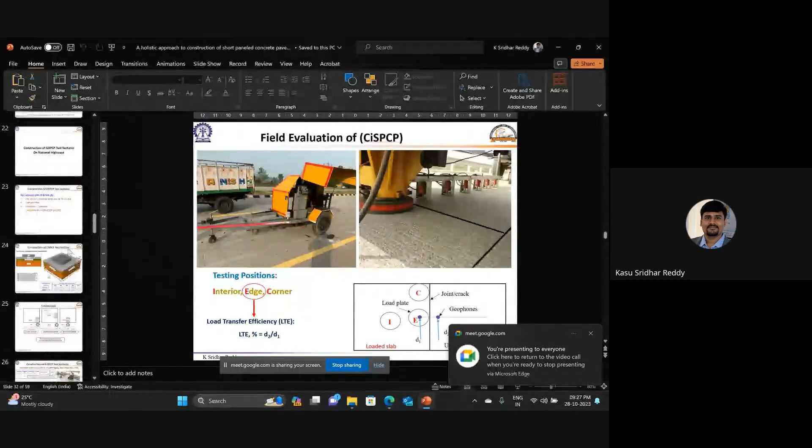Thank you, Sridhar. I think one more clarification was regarding how your load transfer efficiency was found to improve. It was so interesting to see that with respect to time, your load transfer efficiency was found to increase, was found to improve. How do you justify it?

Yeah, this is not in my study itself. This was the case with one of the Canadian studies also. They have gone for inlays of concrete pavement, and they observed a similar kind of observation, but they did not make any statements or conclusions on it.

But as per my observations, if you look at my cursor, the contraction joints that we made in the initial days were cracked, but the adjacent contraction joint, maybe at 1 meter or 2 meter or 1.5 meter interval, must not have cracked during our testing in the initial period. But when we allowed traffic onto it, because of the thermal changes and because of load applications, the adjacent joints were also cracked to full depth.

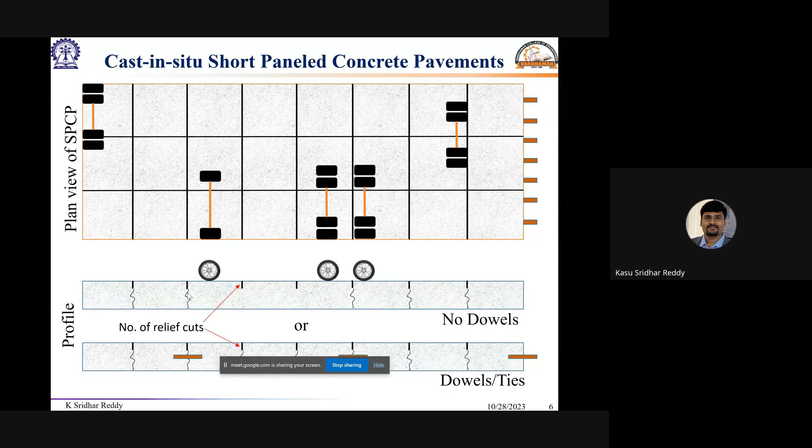So therefore, the joint opening of the same joint is going to vary over a period of time with its age. Since the joint opening gets smaller and smaller with age, the load transfer is likely to increase. So this was my explanation, and these are the things that came into my observation.

Okay, I think Sandeep sir has also told the fact that whatever short panel concrete pavements we used, it is actually designed considering only wheel load stresses. And when I was going through the equations you proposed for stress computation, the temperature induced stresses are found to have coefficients that are very small. So with respect to the wheel load stresses, what was your temperature stress in terms of percentage?

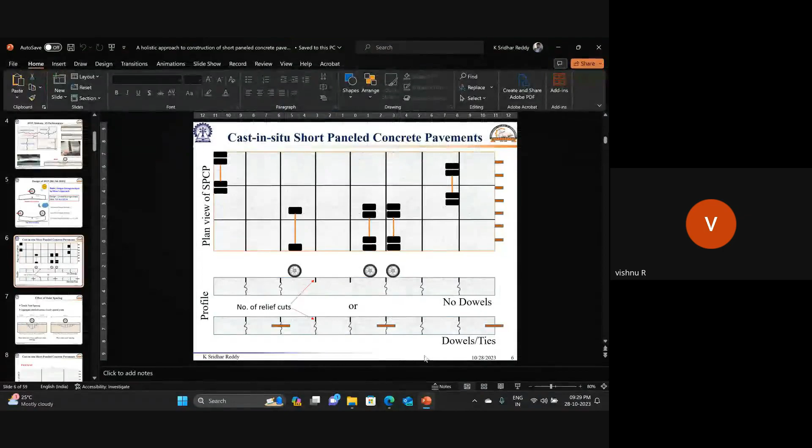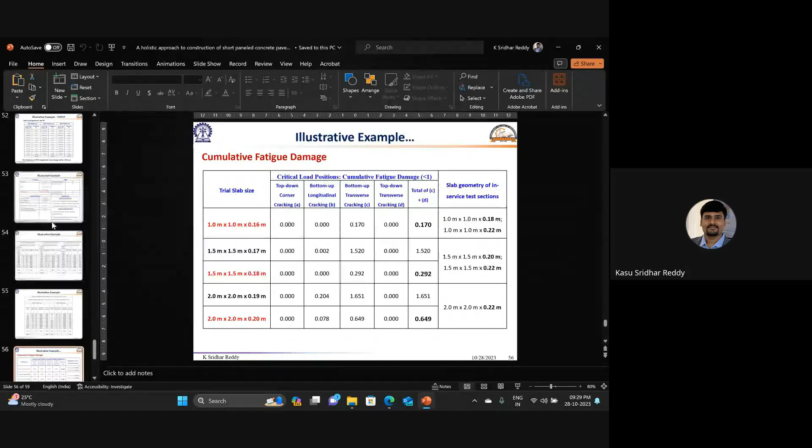They are around 20%, not even higher than that. Okay, so around 10 to 20% that we have seen. So if you see the coefficients with delta T, they're very small. These are very small. So as of now, the sections we have designed in Kerala, the 48 kilometers we are talking about, this has been designed only by considering wheel load stresses.

So in order to complement that, I would like to add an explanation to Sandeep sir and yourself. When it comes to low volume roads, it is expected that they are constructed in vegetation areas, and then they run through maybe urban areas. So it is high chance that the temperature gradient you see, even if you measure it, is going to be much smaller compared to roads laid in an open area.

Because of these buildings and presence of vegetation in and around, the temperature gradients are going to be much smaller compared to the open area road. And in addition to that, I would like to add another point.

The lands, like in Kerala especially, are wetlands and marshy lands. So the temperature gradient and humidity are going to be higher, and the kind of moisture presence on either side of the highway is going to be higher. The water table is very close to the embankment or the subgrade also. Because of that, the temperature gradients are going to be smaller. So it is nothing wrong in considering only wheel loads.

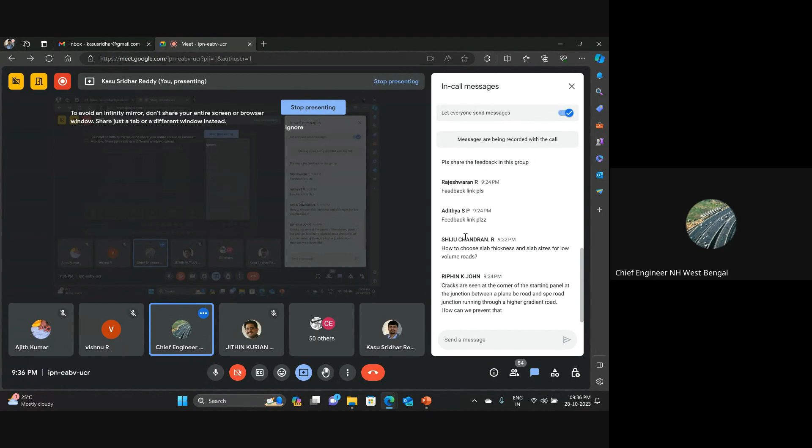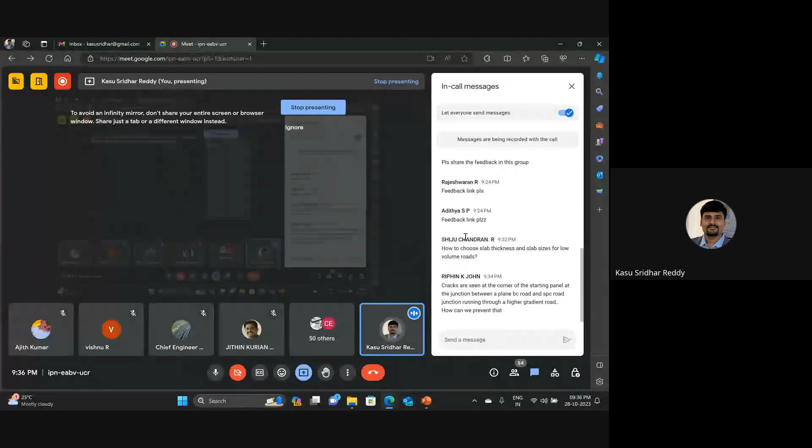Now you may take up this question and clarify further. Yes sir, directly on GSB may not be a good idea, because GSB will have fine content in it, and it is supposed to serve for subsurface drainage also. So when you use the short panel directly on GSB, these fines, or whatever moisture is available in the GSB, may come up and lead to a kind of mud pumping at these contraction joints. In addition, you can propose WBM for about 150mm or 100mm, provided you have the opportunity to alter the gradation for the WBM as per MORTH specifications, ensuring the fine content is less than 5%. I believe all our MORTH and IRC specifications have been judiciously made to counter this kind of issue, and some gradations are directly borrowed from various agencies' guidelines.

I see another question from Shiju Chandran, sir: How to choose the slab thickness and slab sizes for low volume roads?

Sir, the slab size is dependent on how much lane width you are going for and what kind of truck traffic is going to come on it. Coming to the slab thickness, it is dependent on the slab size only. You do not have any other way to directly choose a slab thickness. So for a given slab size, you can go for a variety of slab thicknesses. But for a given slab size, you cannot go for a variety of slab dimensions.

And I could see another question from Riphin K John: Cracks are seen at the corner of the starting panel at the junction between a plain BC road and SPC road running through a higher gradient. How can we prevent that?

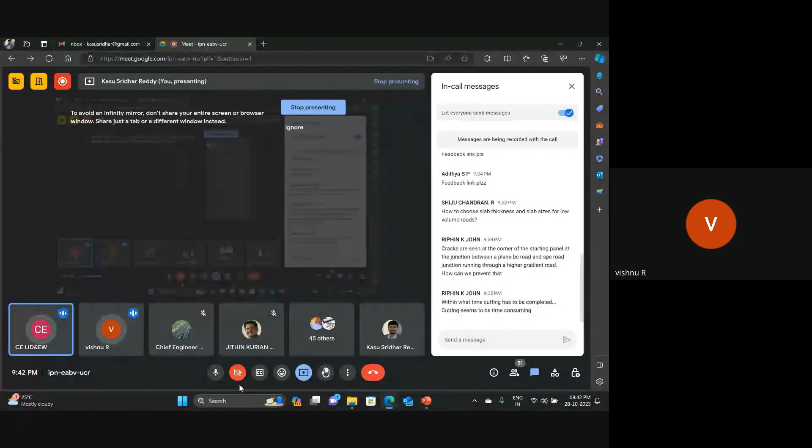So people who all are associated with RKI, in whatever means, could help us in collecting field data. Thank you. Sure, sir, sure, Vishnu sir, I'm here. We are always with you, and we need your support because we are not having sufficient testing equipment with us, and we are seeking the help of engineering colleges. But I think you can help us definitely, because you were there with the RKI in the earlier periods. So we need the evaluation to be done at the earliest because we have already completed the target of RKI, and also in PMGSY we require your support. 100%. So please, give us a proposal so that we can proceed. Thank you.